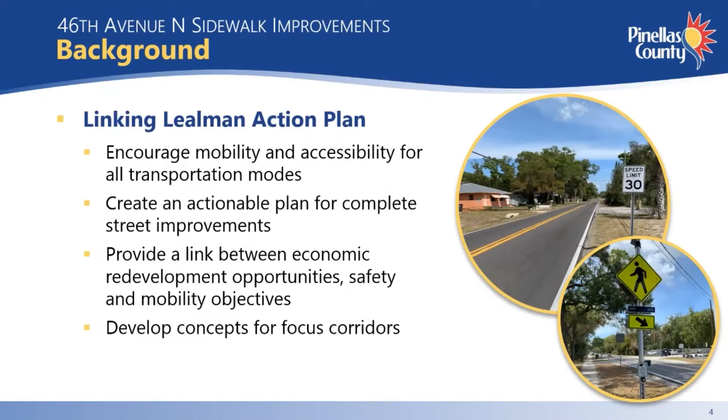The project is located in Lealman, Florida, along 46th Avenue North, from 49th Street North, and continues east for approximately 1 mile to 37th Street North. The county is currently at the 100% design phase of a similar sidewalk project along 46th Avenue North, west of 49th Street North. 46th Avenue North was identified as a focus corridor in the Lealman Action Plan. The 46th Avenue North sidewalk improvements include complete street themes and provide mobility and accessibility for all transportation modes, especially pedestrians and bicycles. The main goals for this sidewalk improvement project are to improve safety and provide connectivity to local parks, the future Joe's Creek Trail, and businesses on 49th Street. The proposed sidewalks are consistent with the sidewalks in the current design section west of 49th Street.

The existing 46th Avenue roadway is classified as a rural typical section with two 10-foot travel lanes, roadside swales, and a 5-foot sidewalk on the south side. The facility has a posted speed limit of 30 miles per hour. The roadway was resurfaced in 2018 and a mid-block pedestrian crossing was added at Neri Park.

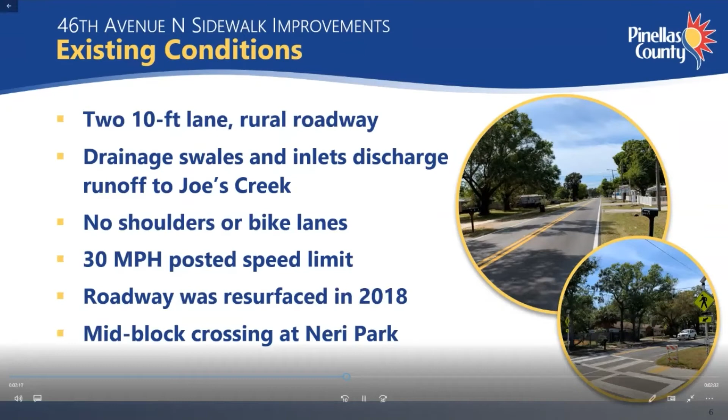Alternative 1 includes the addition of an 8-foot sidewalk on the north side of 46th Avenue and the addition of a 5-foot sidewalk on the south side between 49th Street and 46th Street North. The existing swales may be replaced with curb and gutter to provide positive drainage. Alternative 2 includes the same 8-foot and 5-foot sidewalk described in Alternative 1, with 2 feet of roadway widening to accommodate 11-foot travel lanes.

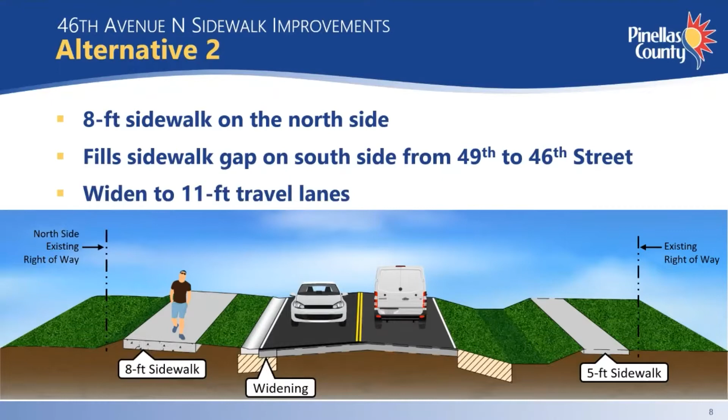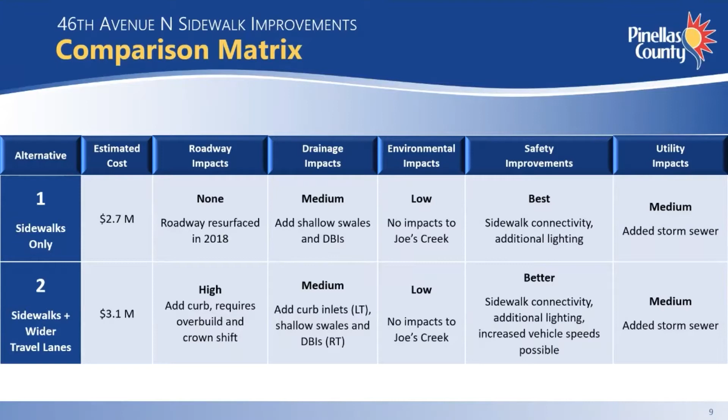A comparison matrix evaluates the two alternatives based on costs, roadway impacts, drainage impacts, environmental impacts, safety improvements, and utility impacts. Alternative 1 has the least cost and minimizes impacts to the existing facility. Alternative 2 has the highest roadway impacts because of the widening and the reconstruction of the road. Environmental impacts are low for both alternatives due to no impacts to Joe's Creek and the lack of wetlands within the project limits. Safety is improved for both alternatives by providing sidewalk connectivity and additional lighting.

Alternative 1 increases safety, minimizes impacts to the resurfaced roadway, and reduces construction duration. Alternative 2 increases safety, however, the roadway reconstruction extends the construction duration. The wider 11-foot travel lanes may cause increased driver speeds through the project limits. A 7-foot parking lane on the south side of 46th was considered. However, it was removed from the alternatives due to the required right-of-way acquisition from private properties.

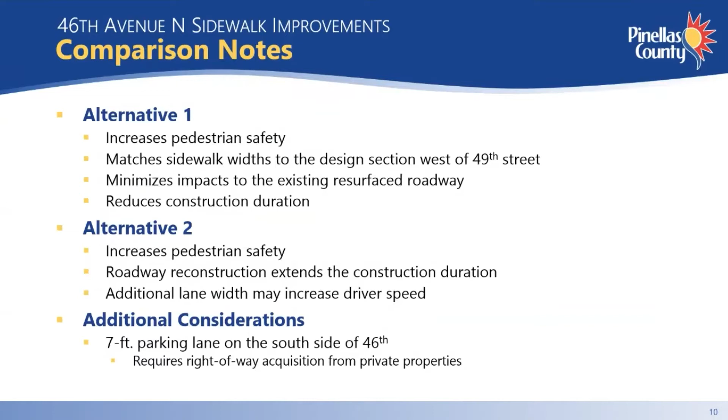The project is funded for Pinellas County's fiscal year 2025-2026. The project has completed a preliminary engineering report and will proceed to the design phase following this project information meeting.

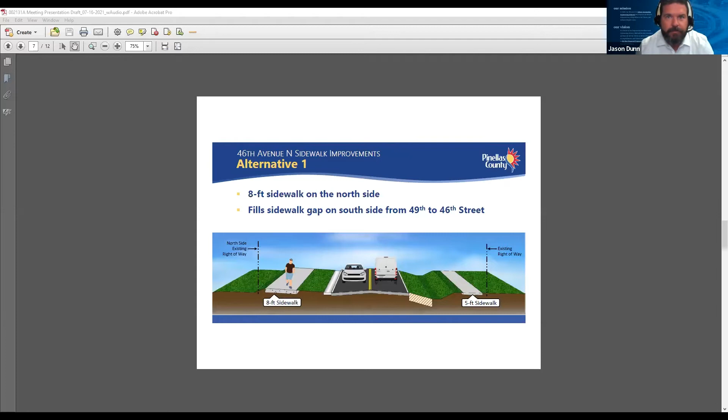Thank you, Mr. Lee. Jason, I was wondering if you could maybe put up the cross section and then talk about the swales. Okay. All right. Is everyone seeing alternative 1? Yes. Okay.

So on a lot of this project, the determination of whether or not there will be a curb drainage system or an open swale will really depend on the elevations at the right-of-way line and how much space we have left. In some areas, we're going to need additional space to get to the back of sidewalk, and that will limit the amount of space between the sidewalk and the roadway. So we really won't know exactly until we get into design whether it will be a curb section or a swale.

One of the benefits of swale drainage, and it's part of Pinellas County's green infrastructure to maintain swales where possible, is they provide a water quality benefit. They do an excellent job of removal of oils and greases from the roadway, so there's a benefit from an environmental standpoint. They also promote infiltration, so they also function as flooding protection, especially when you're against the road.

So there are some benefits to swales, and I think we could work with a landscape architect to beautify these swales during the design process, and maybe eliminate some of the negative aesthetics of a swale that's not properly maintained or sodded, or whatever that may be.

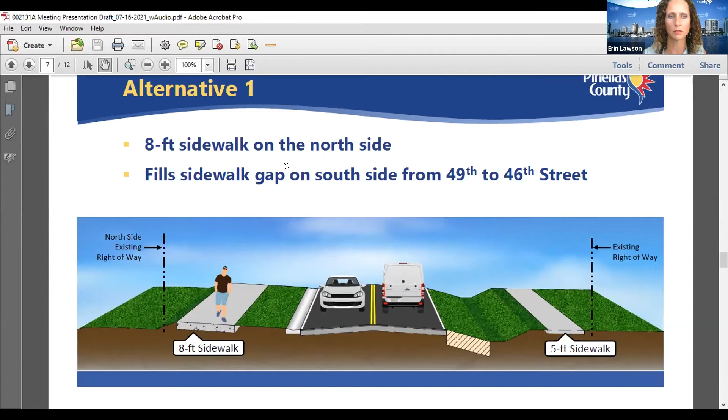The next question is not really a question, it's just a comment. It came up when we started talking about the swales, and the comment is that they also attract mosquitoes. So I just want to make sure that that's in the record as well. We do have another raised hand. So Joe, may I interrupt for just a moment, and this will kind of speak to the mosquito question as well. Jason, would you mind turning off your screen, and I'll share a picture of a recently constructed project where we used a swale with a pipe underneath it, and you can see where the ditch bottom inlets are.

Mr. Jeremy Heath. Mr. Heath, you'll need to unmute so that you can ask your question. Carla, Joan, I believe Mr. Heath may have also called in on 7435. And if that's you, Mr. Heath, I'm going to unmute you right now. Actually, you have to unmute yourself. I clicked the button to allow yourself to unmute. All right, I appreciate it. Thank you. Okay.